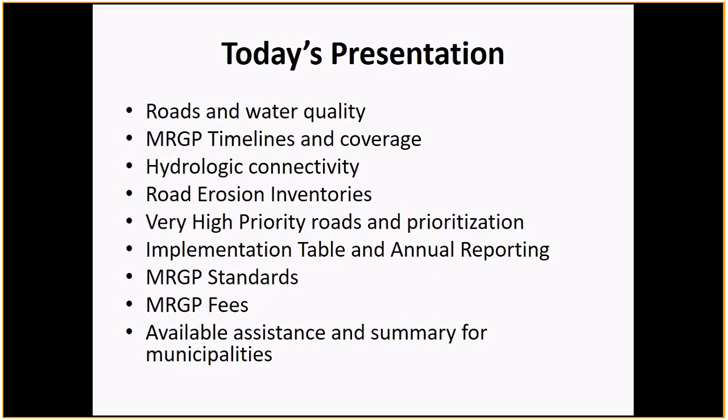These are the latest, greatest road miles, municipal road miles reported by municipalities annually in their mileage certificates to VTrans as required by statute. 13,090 miles is the latest numbers that we have, and that represents about 70% of the total road miles in the state, the largest chunk by far. We have a little bit under 1% federal highway, and we have 14% of the roads in the state that are state highway, and the balance are private roads, about 15%.

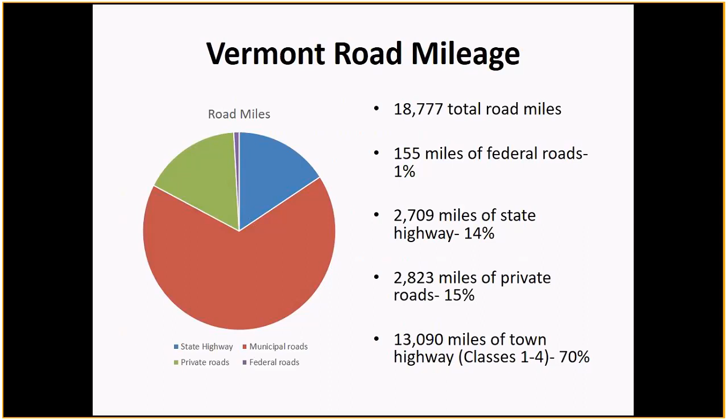Again, these are the latest numbers by road class. The lion's share of municipal roads are Class 3, your typical Vermont gravel backcountry road. Class 2s represent about 21%, sometimes paved, sometimes gravel. We have Class 4 roads, with a minimal level of maintenance by municipalities, generally higher up in the watershed, steeper roads, representing a little bit over 12%. And a very small percent, a little bit over 1%, are Class 1 roads that are generally maintained both by the municipality and VTrans, usually in village center roads.

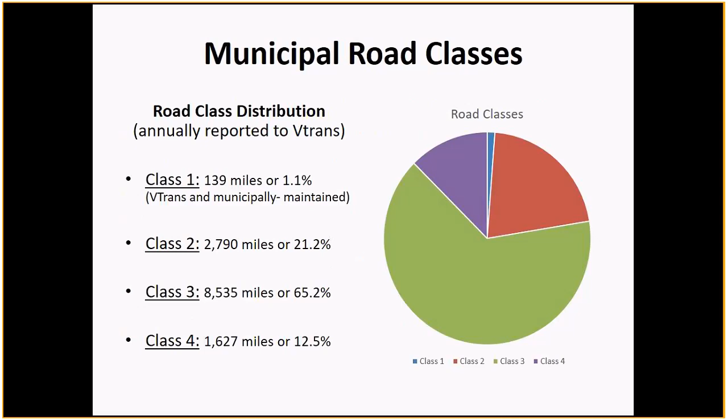So why was the Municipal Roads General Permit created? The Municipal Roads Program is meant to address stormwater from municipal roads. We have other erosion sources around roads, like stream bank erosion or lakeshore erosion, but the focus of the Municipal Roads Permit is to really address runoff coming from roads. What we typically see coming off of roads in general is a lot of sediment, and in turn a lot of phosphorus. Anything that can be discharged from an automobile or applied to a road - hydraulic fluid, gasoline, oil, road salt - can wind up in our waterways.

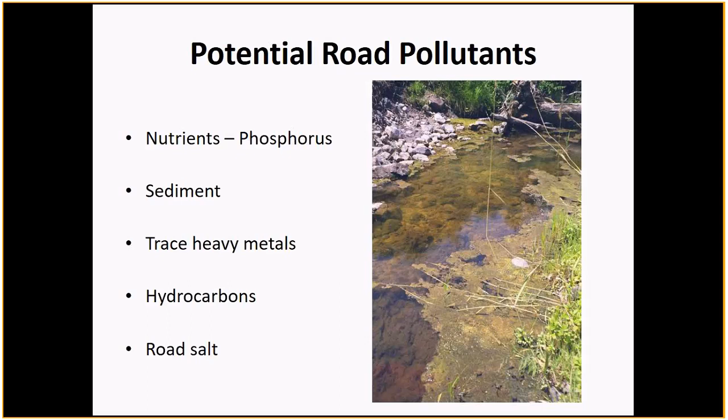Act 64 was created to address a lot of the water quality issues that we've been having statewide, whether it's Lake Memphremagog, Lake Champlain watershed. Also, we have the Long Island Sound that the eastern part of the state drains to. We also have a total maximum daily load for nitrogen for the eastern part of the state. So we have other benefits for water quality.

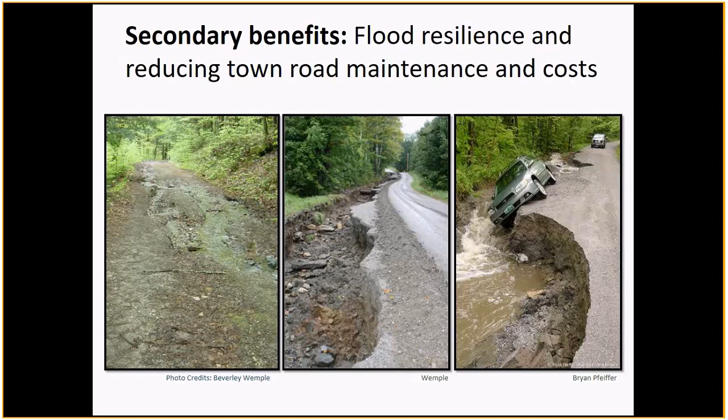Also, just a point that after the initial higher cost of implementing these practices, we've seen many studies where we have long-term savings, both financial and in labor for municipalities in putting these practices in, and reduce maintenance costs.

But a lot of the comments have been addressed in our responsiveness summary, which is available on the Municipal Roads General Permit website, as much of this information, including this presentation.

So just some highlights that I'm going to jump into in more detail in the presentation. We have a July 31st deadline where municipalities will submit a NOI or notice of intent. That's a municipality applying for coverage under the permit. They'll also pay an administrative processing fee at that time, a $240 fee.

DEC will be sending out a mailing to all municipalities about where they can fill out the NOI form. It will be a 1-page form, and we'll have a link to that where it'll be an electronically fillable form, and towns can print that out and send it in with the check for July 31st.

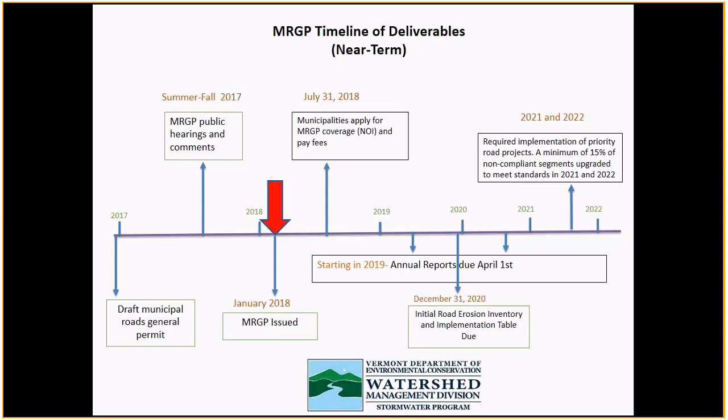The other two major deliverables on this timeline, starting in 2021 or sooner, between 2021 and 2022, for the total of those 2 calendar years, municipalities will be required to bring 15% of their roads that are currently not compliant with our standards up to the standards in that 2-year window.

A little bit, as we look further on the timeline, on the right of the timeline, that's really our drop-dead date of all connected municipal roads need to meet the standards in the permit by December 31st, 2036. That's also tied to the Lake Champlain total maximum daily load deadlines and the Memphremagog deadlines as well.

And in between then, we have another deadline of the very high priority roads, except for class 4 roads, will have to be brought up to standards sooner. That date is December 31st, 2025. The class 4 road, very high priority roads, will have to be brought up to the standards by December 31st, 2028.

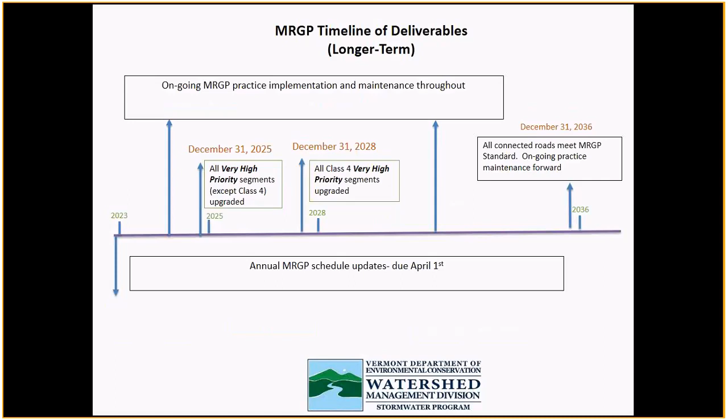And annual reports due throughout on April 1st.

So what or who is covered under the Municipal Roads General Permit? Town highways, classes 1, 2, 3, and 4 roads, and the stormwater infrastructure associated with town highways under the operational control of the municipality. The exemptions are unorganized towns and gores, and MS4 towns are exempt from the permit, having to apply for coverage under the permit and paying the fees, but their practices, their required standards would be incorporated in their future stormwater management plans.

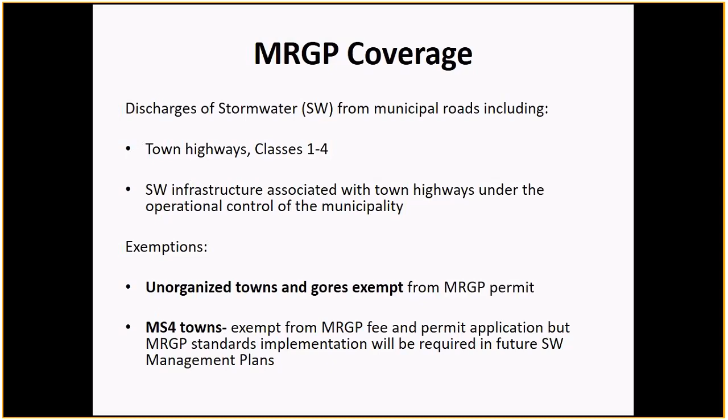What are MS4 towns? A lot of Chittenden County towns, as well as St. Albans and Rutland towns, and Rutland City will be joining those. Those are under the municipal separate storm sewer system permit, which is a separate, more expensive permit. If they're exempt from the fee, how is it more expensive? There's an MS4 fee, which is a more expensive fee.

What is not covered by the permit are perennial streams. So any culvert crossing on a perennial stream, or any retrofit to a perennial stream, is covered by the DEC stream alteration permit. So none of the standards are applicable to perennial stream related crossings. Also, the MRGP does not require stream bank or lakeshore bank protection along road embankments. So if you have an eroded road embankment because of an eroding stream, stream in disequilibrium, or lakeshore wave action or ice action causing erosion, that is not required to be addressed as part of the permit.

And also, if these permit requirements would trigger another state or federal permit, that practice will be waived. In other words, we don't want the MRGP permit having to trigger another permit. There is an exception here from the Army Corps of Engineers non-reporting or self-verification permit.

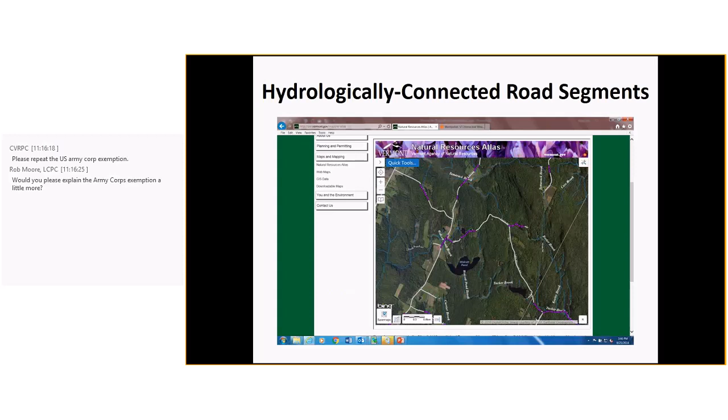The quick answer is the U.S. Army Corps of Engineers has a new general permit, a statewide Vermont general permit, that just came into effect January 1st of this year, and they have 25 or 26 different permit categories. The Army Corps of Engineers has jurisdiction for perennial streams, wetlands, intermittent streams, and ephemeral streams. If the footprint of, say, a culvert replacement on an intermittent stream is less than 2,500 feet, and if the practice is that the culvert is changed out in the window June 1st to October 1st, it would be under the self-verification permit. Therefore, it's non-reporting to the Army Corps of Engineers.

So some of our requirements for drainage culvert upgrades, if we have an eroding culvert and it needs to be upgraded to the municipal roads standard, could potentially trigger a DEC wetland permit or an Army Corps of Engineers permit, whether it's a wetland or a stream. So if it's under that self-verification permit under the Army Corps of Engineers, we're still going to be requiring that practice to be implemented as part of the MRGP. Okay, thanks.

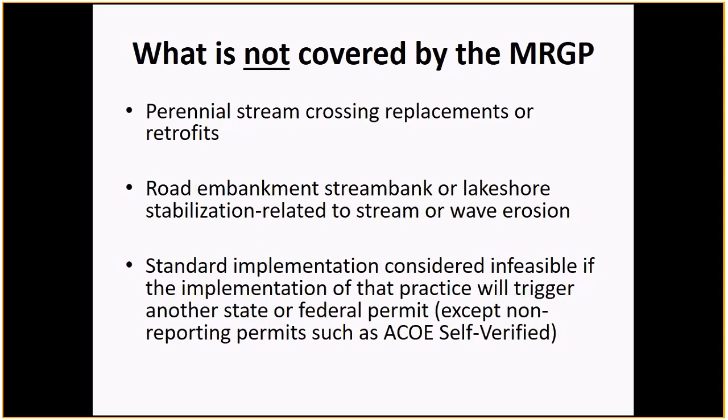So connected roads, more specific criteria. If we have a municipal road class 1 through 4, and it was within 100 feet, it's really a GIS proximity analysis. So if it was within 100 feet of a water resource, or the municipal road bisected or crossed a water resource, or it was within the DEC river management river corridor layer, those would be flagged as connected. When we talk about a water resource, we're talking about perennial streams, intermittent streams, wetlands, lakes and ponds. Those would be flagged at the GIS level.

There are opportunities for towns and those folks working for towns doing the road erosion inventories to change the connectivity status of a segment based on field conditions. Those field criteria are in the new MRGP. So as long as they follow that criteria, they can add a road as connected or take a road off that was connected as not connected.

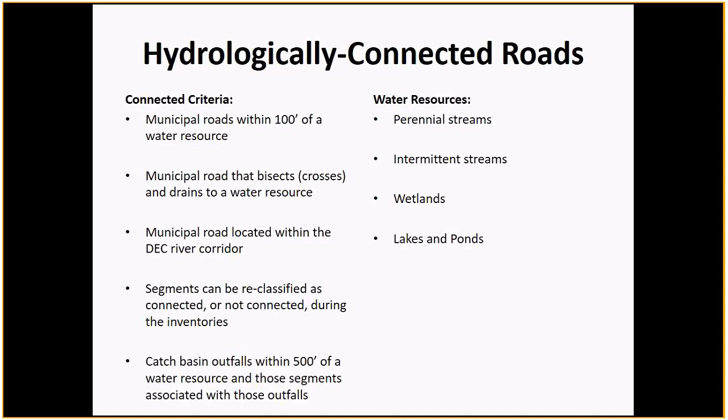And for paved roads with catch basins, the connectivity criteria is 500 feet out from the outfall of the catch basin to a water resource.

The major pieces of the Municipal Roads General Permit are really first looking at that connected road layer, using our road erosion inventories to go out in the field and assess the condition of the connected roads to see if those connected road segments meet our standards, taking the results of the road erosion inventory and putting those results in the implementation table. We're working very closely with our GIS staff here at DEC and our database staff, as well as the GIS staff at the regional planning commissions, so that we can do a lot of this work electronically. We can collect the road erosion inventory data in a collector application and summarize those results from the road erosion inventory into the implementation table.

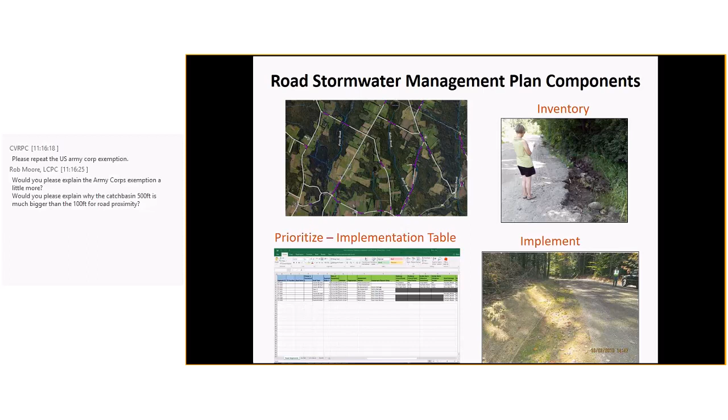Question? Yeah, there's a question from Rob at the Lamoille County Planning Commission. Would you please explain why the catch basin 500 feet is much bigger than the 100 feet for road proximity? The short answer to that question is that the outfall generally collects a larger drainage area, so we have to go a little bit further out from 100 feet to 500 feet.

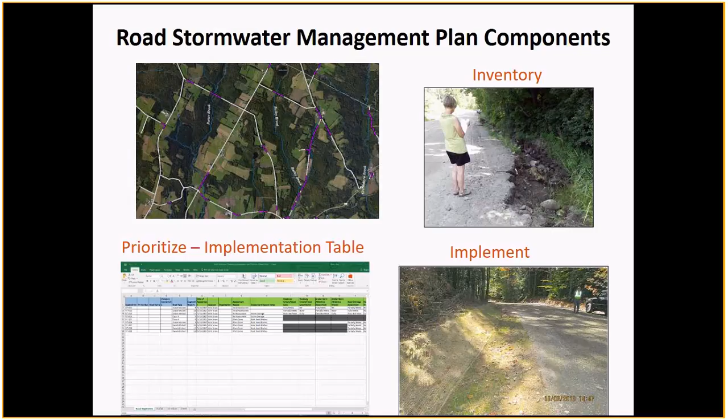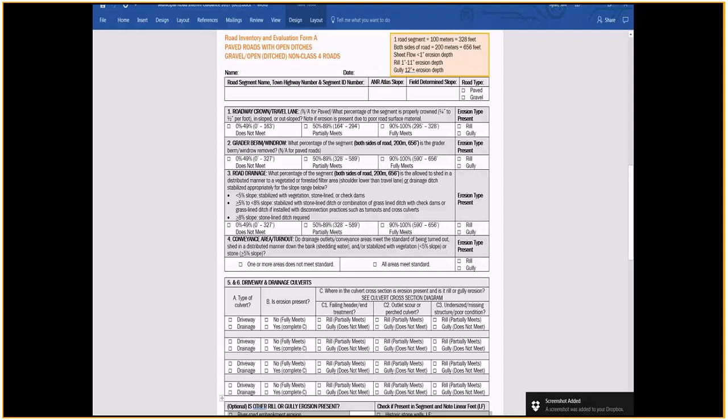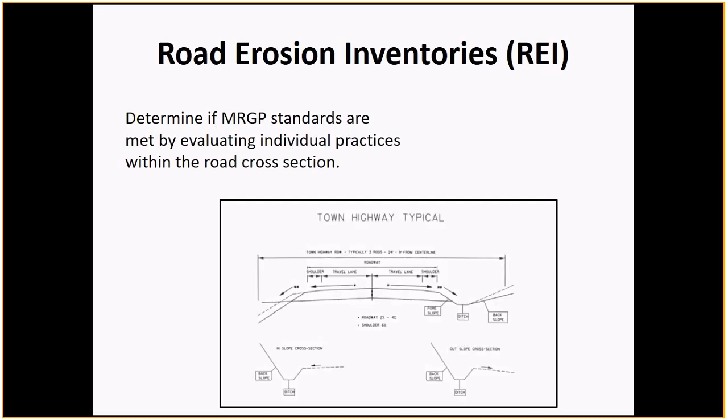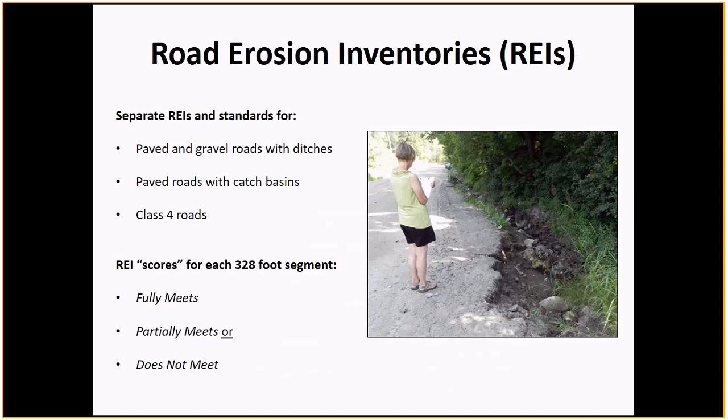So based on our road erosion inventories, we essentially score each segment of road. It either fully meets our standards, partially meets our standards, or does not meet our standards. Partially meet and does not meet both mean does not meet. In other words, towns will have to do work to bring them up to standards, whether it's a partial or a does not meet. It's generally a degree of work needed. A partially meet generally needs a little bit of work. A does not meet is generally more erosion and more need of practice installation.

So we mentioned this date before. The road erosion inventories will be due on December 31st, 2020, as well as the implementation table. The first implementation table is essentially a snapshot of the road erosion inventory results. All connected road segments would have to be brought up to the MRGP standards before December 31st, 2036. It's a picture of a hydroseeder there. We've been heavily promoting hydroseeders for municipalities. That is a quick way to get seed and mulch on a surface where recent work has been done, and that's really timely, especially for the fall ditching.

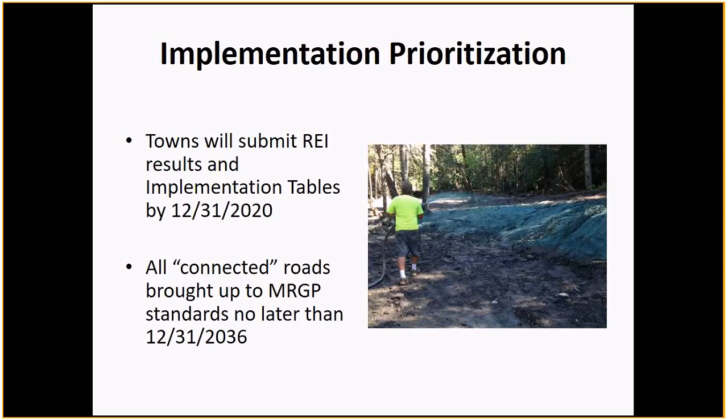So what do we mean by very high priority segments? That terminology is based on the different road types. For gravel and paved roads with drainage ditches, if the score does not meet, essentially the worst score on a very steep slope, greater than 10% slope, that means that it's a very high priority.

And paved roads with catch basins, if we have significant erosion at the outfall. We changed this designation when we updated the permit after comments. That number is 3 cubic yards of erosion measured at the outfall. So cubic yards, we have length multiplied by width, multiplied by depth, divided by 27. That gives us a cubic yard number. So we're just looking at the outfall. It's a significant erosion, like in the picture there, that would have to be addressed by 2025.

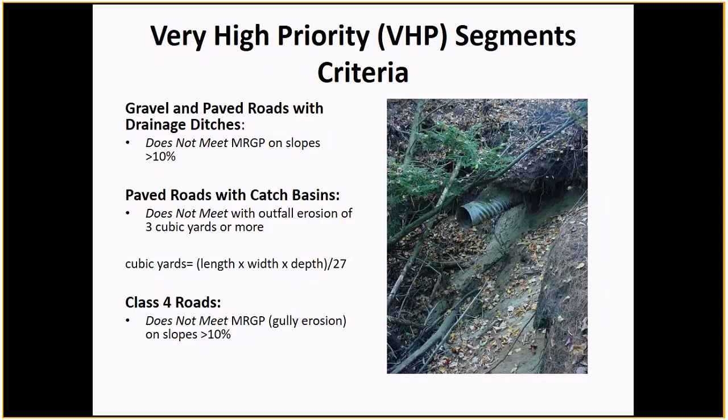Class 4 roads does not meet, so we have gully erosion. Gully erosion is a foot or deeper of erosion on a connected Class 4 road. So if that Class 4 road is close to water, and we have more than a foot of erosion, that's considered a very high priority road segment. That would have to be upgraded by 2028. We heard a lot of responses from municipalities on accessibility on Class 4 roads, and we gave them a little bit more time than the other road types.

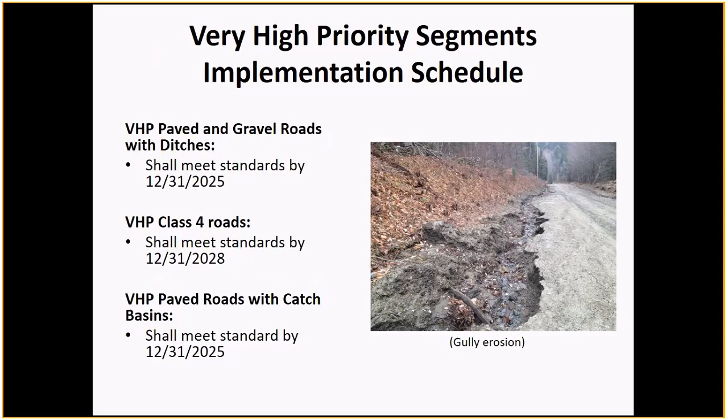I just mentioned these dates, so the catch basin very high priorities and the gravel and paved roads with drainage ditches have to be upgraded before December 31st, 2025. This is a screenshot of the implementation table that I was mentioning earlier. We're putting the final touches on this with help from our DEC and Regional Planning Commission folks that are working on this. So to give you an idea, we have the segment identification number, town highway number, town road name. If there was a change in connectivity from the ANR Atlas, what is that road type? Is it paved or gravel with drainage ditches, or catch basin road, or Class 4 road?

And who did the assessment, the date of the assessment, and what is that compliance score for that road segment? Is it fully, partially, does not meet? That 15% number is taken from the initial road erosion inventory, and so 15% of the does not meet or partially meet need to be upgraded before the end of the 2022 calendar year.

I'm sorry, who is going to be doing the assessments? That is entirely up to the municipality. It could be the municipality themselves, or they can hire a consultant or regional planning commission. In some parts of the state, the Natural Resource Conservation Districts are doing that work. So it could be whoever the town chooses, as long as they use our road erosion inventory forms and put the data in the implementation table.

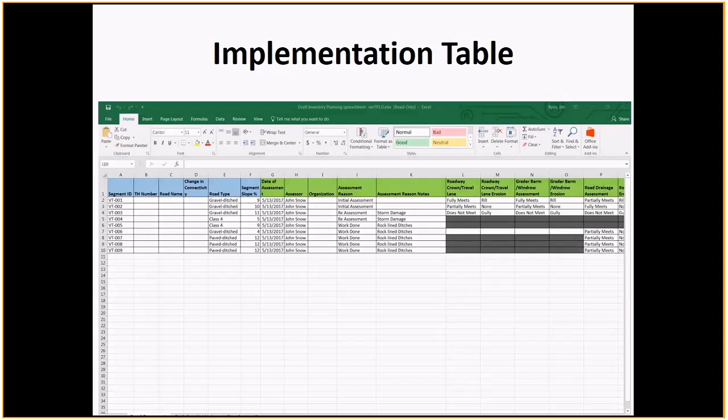So the required components of the implementation table, we will have a template for towns to use. Again, the road erosion inventory results, the compliance scores, and towns will start reporting to us on that April 1st date which segments of road they've worked on in order to get to their 15% number. And we need 100% implementation by the end of 2036.

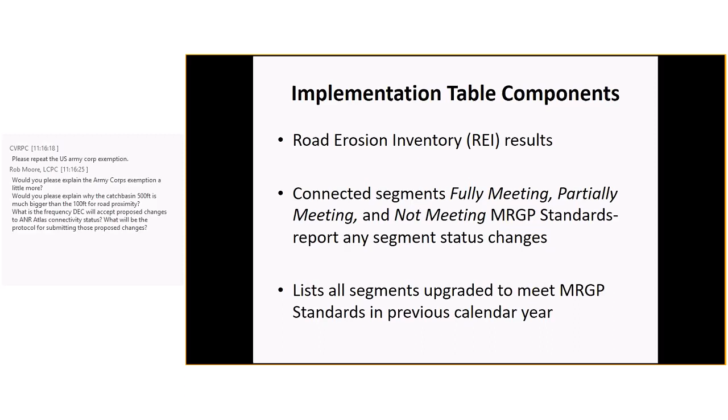Thanks. What is the frequency DEC will accept proposed changes to the ANR Atlas connectivity status, and what will the protocol be for submitting those proposed changes? The field changes in connectivity can happen at any time. We're not going to change the ANR Atlas layer, though. Just towns and folks working for towns have the ability to change that connectivity status at any time. Okay, thanks. Thank you.

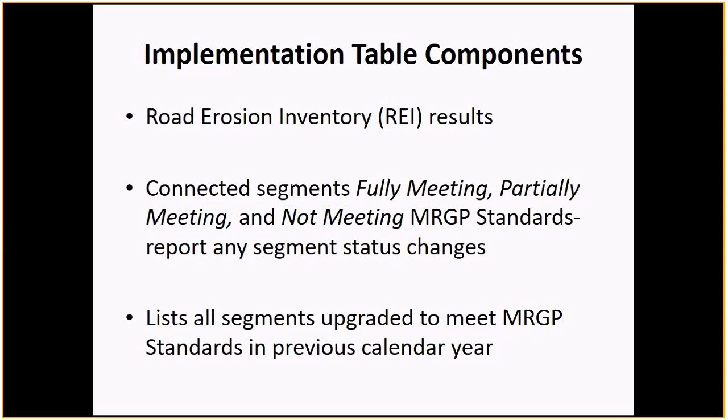There's a question in the room. Did I see a hand? No. Nope.

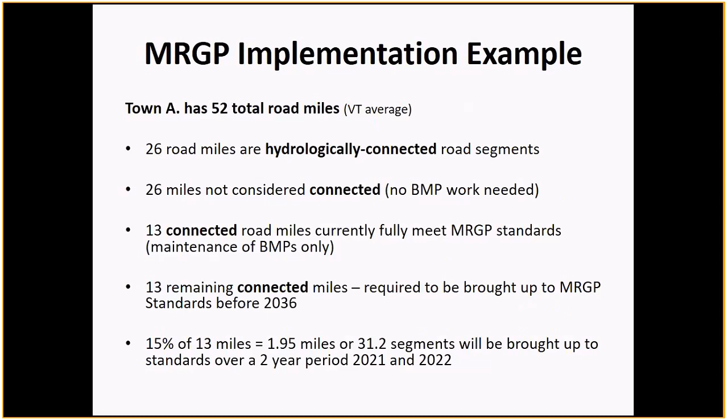So the annual report starts in April 1st, 2019, a little bit more than a year from now. And the first annual reports before the road erosion inventories are due will be a very simple form, and essentially we just want to make sure towns are working towards that progress in getting their road erosion inventories completed. And if they have done any work, they can let us know at that time.

Again, the first 2 years of the permit, no implementation work is required, strongly recommended, but not required. We just want to know if they're keeping track that they've already done their road erosion inventory, or they're planning on doing it the upcoming field season. We just need to know what they'll be doing there, and any changes to the road segment compliance status. So in other words, if the town's worked on a bunch of road segments and they brought them up to standards, they can let us know that in their annual report.

Good. Okay. Thanks. Sure.

So our principles overall, we think of the more broader principles when we get to a site. A lot of us in the room, online, spend a lot of time with road crew, road foremen, doing site visits and providing technical assistance. And I often encourage municipalities to start at the top of the hill or the road watershed and work our way down, walk down to the bottom of the hill where we generally have a water resource. Look for disconnection opportunities. So where can we get that runoff from the road off of the roadway and into a vegetated area as quick as possible?

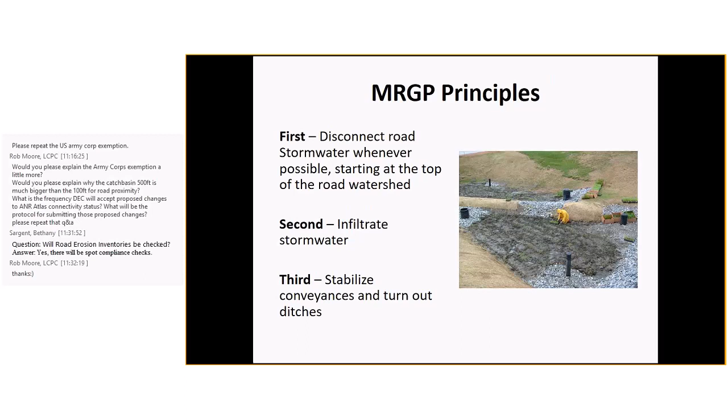The more we shed the stormwater further up in that road watershed, the less erosion and sedimentation and other pollutants impacting the water resource down below. So we look for disconnection opportunities first, infiltrating that into grass and forested areas. When we have to convey road stormwater, put it in a ditch or a culvert, we have to make sure that those conveyances are stable.

So our ditches have to be grass or stone lined depending on slope. Our culverts have to be appropriately sized and not eroding from the pipe being too small, from erosion around the inlet or the outlet, and turning out that water whenever we can. So the end of that drainage ditch is not directly feeding into a water resource whenever possible. If that's not possible, it's at least stable with stone and grass.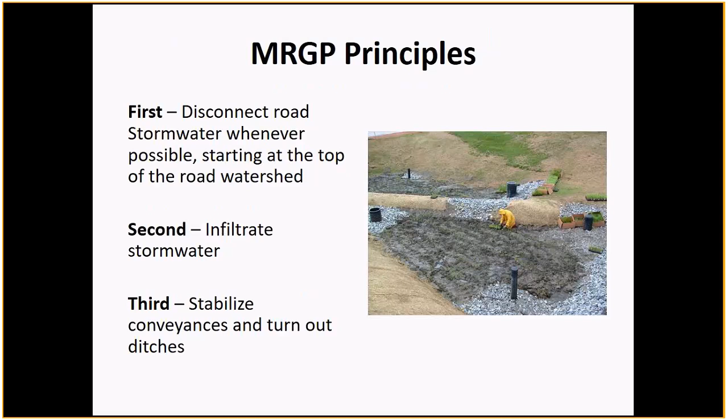We're going to jump into the weeds a little bit, into the standards.

How are we doing on time? It's 11:30. 11:30, okay.

We call the implementation triggers, so when a practice has to be implemented. We have baseline standards, so those have to be in place no matter what the road erosion inventory conditions are, even if there's not any erosion in place, as proactive practices. So that's our road grading, having that proper crown in place, grass and stone line, ditching or distributed flow or sheet flow, having grader berms removed, having our road shoulders lower than the travel lane, and having stable turnouts.

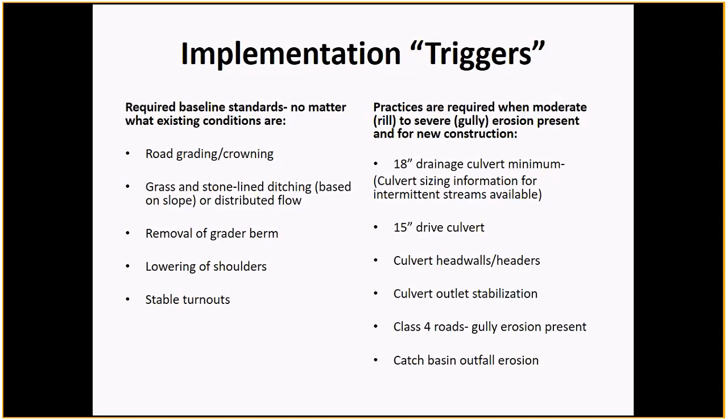The erosion-related triggers, implementation triggers, are mostly around culverts. So we're not requiring any upgrade or retrofits to culverts if they're stable, if there's no erosion. We're only requiring retrofits or upgrades if we have rill, that shallow erosion, or gully erosion. If there's an erosion problem around a culvert, that culvert either has to be retrofitted with a culvert header or outlet stabilization, or upgraded depending on what's causing the erosion. A little visual again of our rill and gully erosion, shallow erosion versus deep erosion.

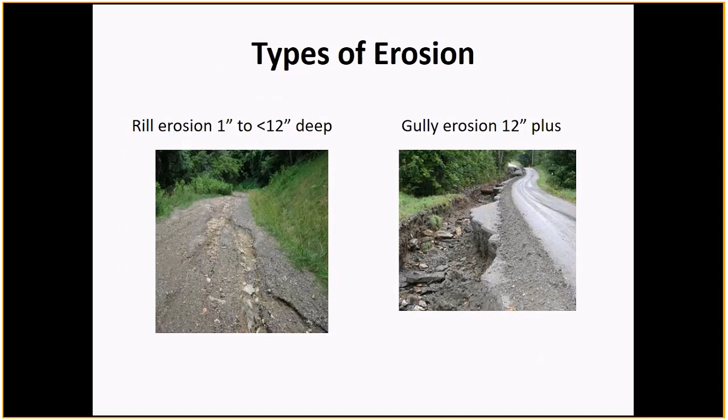This is a fairly new item that's going to come into place immediately, the 2018 field season. I field a lot of phone calls and emails from folks. We typically see in a lot of cases towns doing their ditching in the fall and leaving their ditches through the winter. And we have fall and spring erosion if those ditching or culvert replacements are not stabilized with grass or stone.

So again, we're really promoting the use of hydroseeders. And there are smaller versions of hydroseeders that are a lot less expensive. So when towns are working on connected road segments, any of those purple highlighted road segments, doing any practice, they need to stabilize that within 5 days or an oncoming storm event.

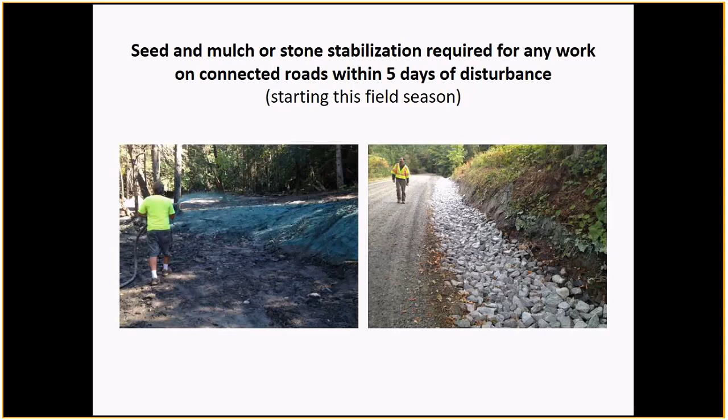Okay, road crown. The top picture, we have water flowing parallel down the travel lane. That's what we're trying to avoid. We want it to shed in perpendicular fashion. We have multiple options. I always tell folks there's never just one way to meet the standards. We have lots of options. That top picture, we can create some ditches on either side, or we can bring the road surface up so the travel lane's higher than the sides. We can put some good gravel down.

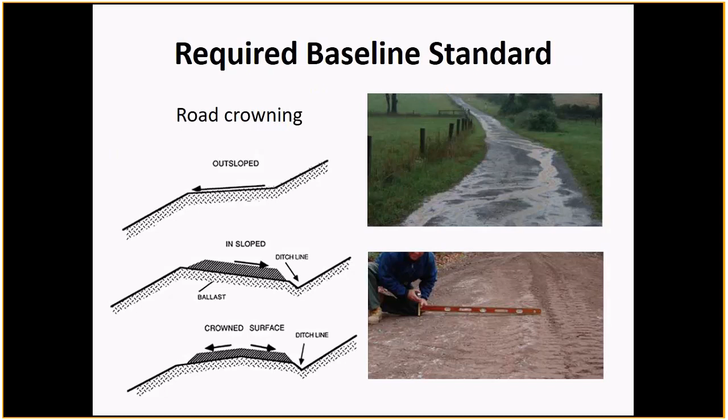On the bottom, on the left-hand side of this screen, that's our typical road crown, highest point in the middle. But we also can in-slope or out-slope. So we can pitch the road from one side to the other, especially if we're going around a turn. Sometimes that makes sense, if we have a steep embankment and we don't want to send the water down the steep embankment. So lots of options to meet that standard. Again, we have a grass line or it's erosion matting there on the top left, stone line on the right, and what we call distributed flow or sheet flow on the bottom left.

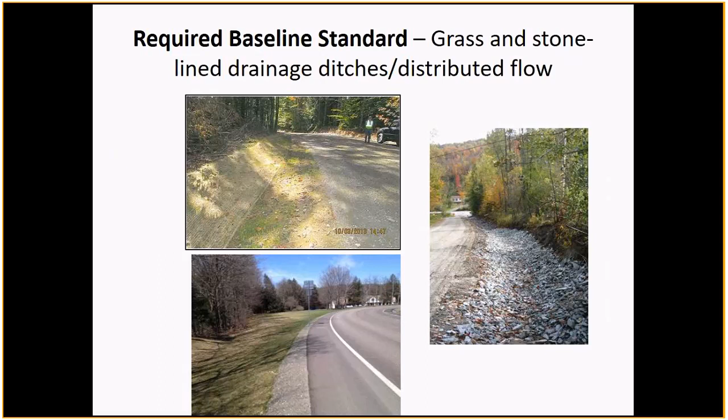We want the road shoulders to be lower than the travel lane. If they can't be lower than the travel lane, we have to put the water in a ditch. Here are the specifics, slopes for the grass and stone line options. The two middle columns are really the focus of this table.

If we have distributed flow or sheet flow, there's no ditch needed, so if the travel lane is up higher than the road sides, that's good. Grass line ditch applies in the 0 to less than 5% slope range. If we jump to the bottom, greater than or equal to 8% requires stone, 6 to 8 inch minus minimum, 12 inch minus recommended for slopes greater than 10%. In the middle, between 5 and 8%, towns have options.

This is a little different than the VTrans Orange Book standard. We try to give towns a little more flexibility. If they can disconnect the water, essentially putting in two cross culverts or two turnouts within each road segment, it could just be grass lined. They could use grass line and check dams, or they can stone line. So we want to give towns some options on how to meet that standard.

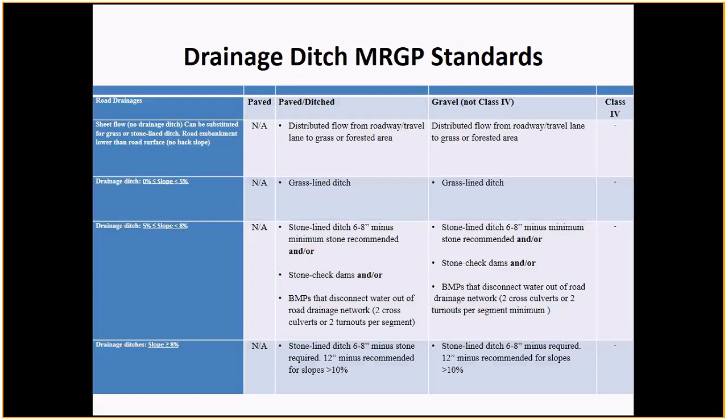Question from Rob online: Would you please explain why the MRGP is 5 days for stabilization, but the Vermont Low-Risk Site Handbook has varying timelines based on weather?

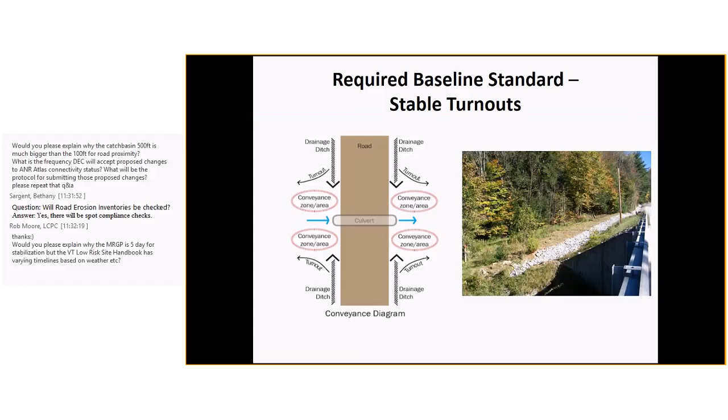I guess the simple answer is this permit's a little different than the other permits. That standard is also, I believe, in either an Orange Book standard or maybe the Better Roads Manual, but it's in another standard as well. We felt that 5 days was a fair amount of time. It gets too complicated if we start putting equations based on rainfall amounts and dates, so I wanted to try to keep it simple.

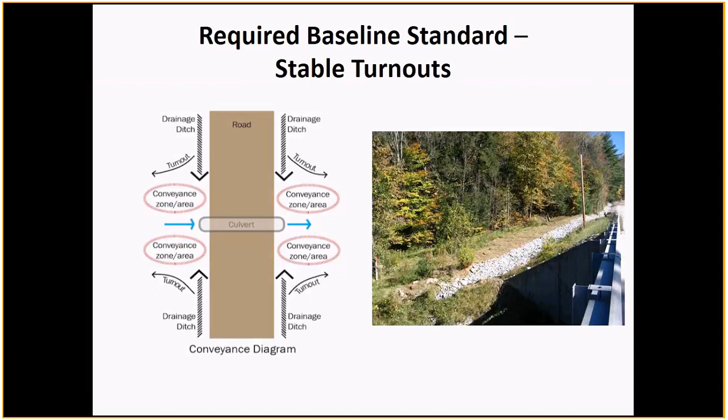Thanks, Jim. The picture on the right is a stone-lined ditch on the upper part of that photo, and we have a stream with bridge abutments. In this case, the turnout had to go around the road abutment and it's stabilized with stone.

This one I think is going to be one of the bigger lifts for towns. Getting rid of the grader berm generally doesn't require towns to apply for grant funding to remove it. For the most part, unless they have extensive grader berms town-wide, when towns generally grade their roads 3, 4, 5 times a year, that could be a good time to remove the grader berm.

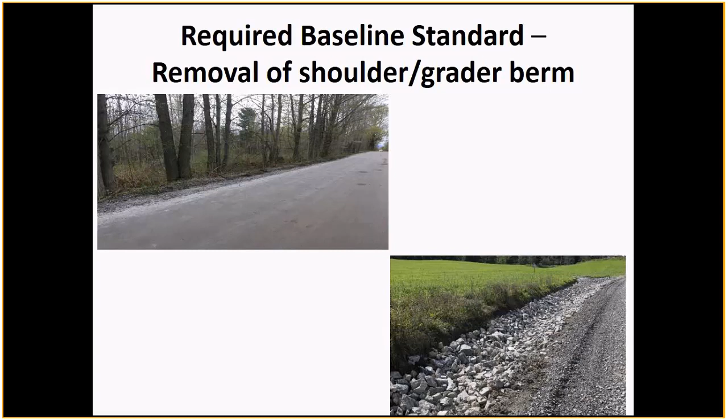So water can, again, not flow parallel down the road, but can shed into the vegetated area or the ditch. High road shoulders - we try to parse out the high shoulders from the grader berm. High shoulders generally need a bigger piece of equipment, an excavator, a backhoe, a loader to remove that material, and dump trucks to haul it away because there's established vegetation there. But in this case, water cannot get off the road because the shoulder is up higher than the road.

Alternatives: the picture on the right is where that shoulder was lowered. As I said earlier, the alternative is to bring up the roadbed by adding gravel. So as long as we could do one or the other.

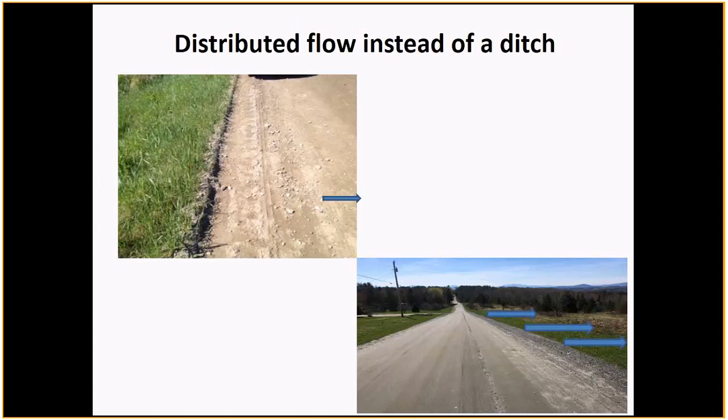Driveway culvert minimum for replacement: when the town has to replace a driveway culvert within the right-of-way, it's 15-inch, the same as the Orange Book standards, meaning the VTrans Road and Bridge standards. A lot of these standards are very similar to the existing Orange Book. We tried to clarify and organize them by road type, and made a few minor changes.

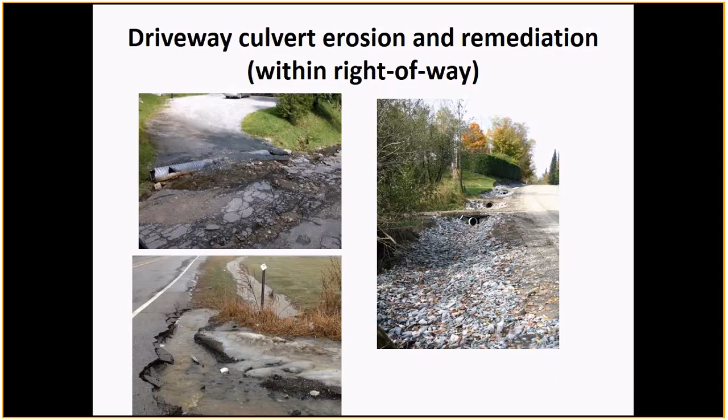The picture on the left doesn't meet standards. We have rill erosion—the culvert could be improperly installed, at the wrong angle, with poor backfill material, maybe not compacted. There could be lots of reasons why that's happening, and it could need a header. We're trying to find out, in the road erosion inventory, the degree of erosion, whether it's rill or gully erosion, and where that erosion is happening. That will help us decide what practices are needed, whether it needs to be retrofitted or replaced.

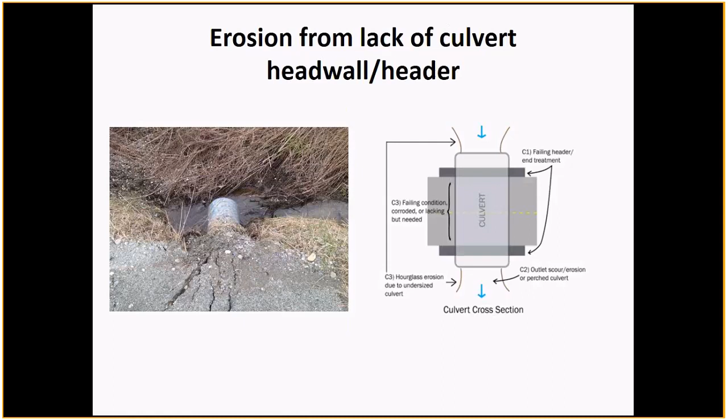Culvert outlet erosion—we see this a lot as well. We do have a drainage culvert minimum diameter of 18 inches, so when towns have to replace a drainage culvert, a non-perennial stream culvert, it has to be at least 18 inches.

Our river management program has developed intermittent stream culvert sizing guidance, available on our Municipal Roads General Permit website, based on field measurements of the active channel and also by drainage area, by acreage going to that pipe. We have a version of that on our website now and will be updating it shortly. That's a recommendation—often these drainage culverts carry intermittent stream flow and should be, in some cases, 3, 4, or 5 feet in diameter, and we're seeing a lot of those undersized and improperly installed.

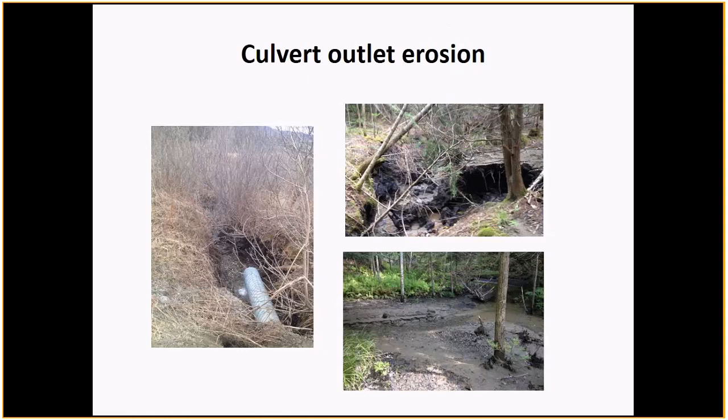Catch basin erosion. I don't know if Montpelier is in the room or online, but this was in Montpelier—this is what we have going into our catch basin inlets, and we often have a lot of erosion on the outlet.

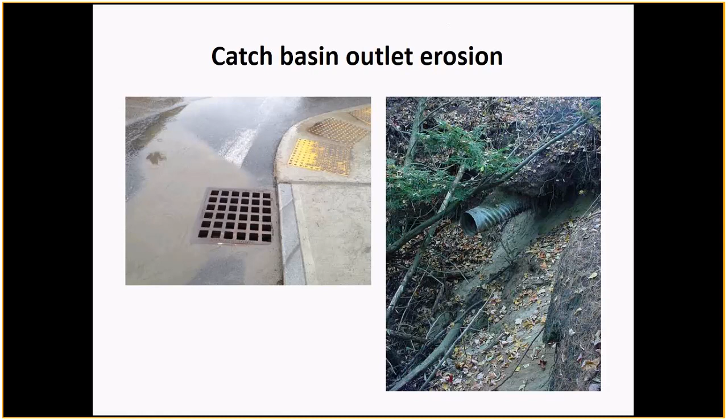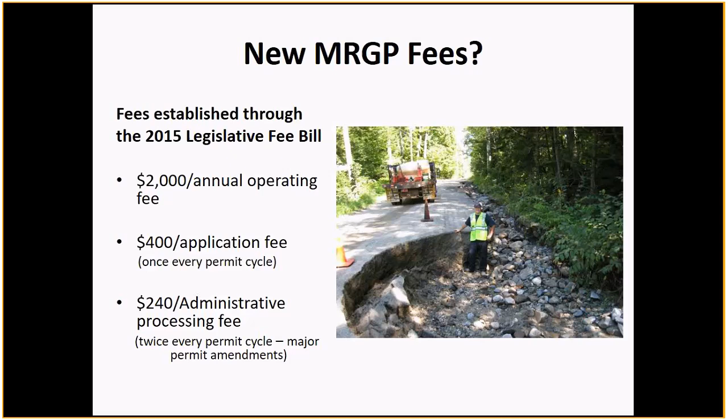Summary for municipalities: we have July 31st as the deadline for permit coverage application, the NOI, Notice of Intent. Also, fees start—the application fee will be due right away with the NOI, while the other fees will be due a little later in the year, probably around June of the following year from 2019. Annual reporting begins April 1st, 2019.

The road erosion inventory and implementation is due December 31st, 2020, with implementation in the 2021, 2022 field seasons or sooner. 15% of segments that don't currently meet standards have to be brought up to standards. The very high priority segments must be brought up to standards for all road types except Class 4 by December 31st, 2025, and by December 31st, 2028 for Class 4 roads. All roads must be brought up to standards by December 31st, 2036.

We have our new DEC grant in aid program. There's a flyer on our Municipal Roads General Permit page covering all financial assistance available for municipalities. We also have Better Roads represented here today for VTrans—their Better Roads program has funding available for Category A, road erosion inventories, covering 80% of the cost, and towns can use their time and mileage for in-kind match. There are also Categories B, C, and D grants to implement some of the practices discussed today, including stream culvert replacements and bank stabilization.

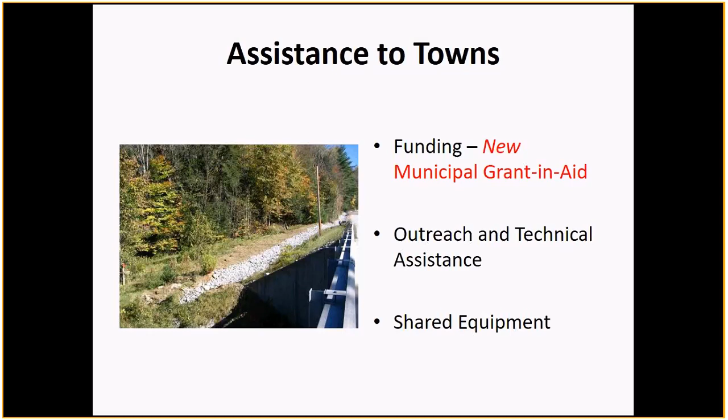Grant in aid is a new program that DEC started this current fiscal year. We had 2.6 million dollars in funding this year, with about 70% municipal participation. By the end of the fiscal year, about 42 municipal road miles will have been brought up to our new standards as part of that grant implementation.

So towns receive the funding and agree to work on connected road segments that currently don't meet our standards, committing to bring those segments up to standards—so we'll know that the segment they worked on currently meets the standards.

The regional planning commissions are helping administer that grant and providing technical assistance. We're submitting a $2.9 million proposal for this next fiscal year.

Do you have any idea when the reimbursements will be made for work that was done last year? I don't, Bethany, do you know? No, I don't know. Sorry, we can follow up with you about that.

Jim, do you know if there's any federal capitalization for the grant in aid program, or is that solely a state resource? That's solely a state resource, but we also have federal funding in Joel's program here in the room, in the stormwater mitigation funding. How much money do you have in there, Joel?

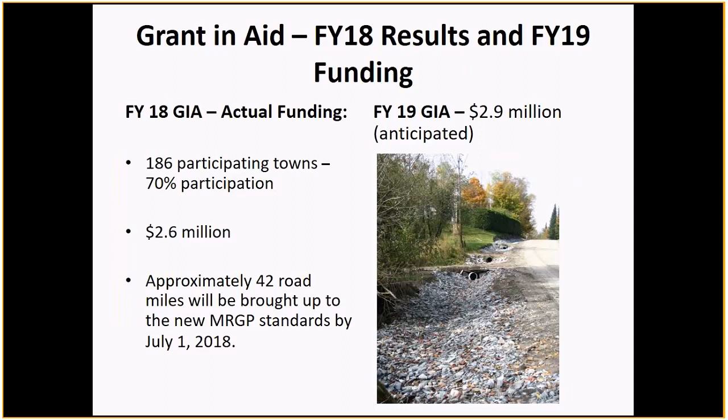All right, so it's pretty quiet in the room, pretty quiet online. We have a few questions. A lot of this information is on our website, it's a very long URL, but if you Google Vermont DEC Municipal Roads Program, you will come to our website, and we have fact sheets, summary sheets, frequently asked questions, the PowerPoint, and a lot of this information that we conveyed.